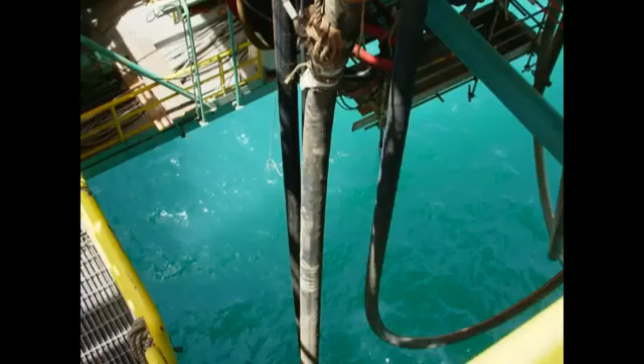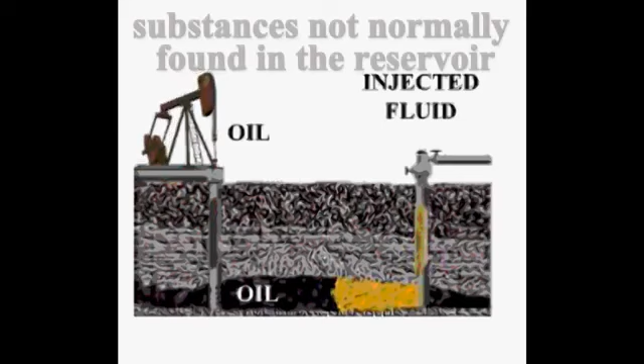Now let's discuss recovery methods using substances not normally found in the reservoir. There are several. The first is thermal recovery.

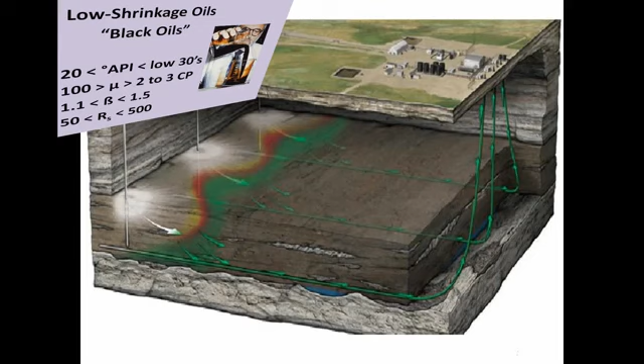Thermal recovery is preferred for heavier oils, especially oil with about 20 degrees API gravity or less. These heavier oils also usually require a secondary recovery mechanism earlier in the production cycle than lighter oils. In thermal recovery, heat is injected into the formation, reducing the viscosity of the oil, allowing it to flow more readily into the producing well.

As in water flooding, injector wells must be drilled, increasing costs. Instead of water, though, heat is injected into the well. In certain conditions, however, that heat can be created in the reservoir itself. There are three techniques used in thermal recovery, some more successful than others, but each offers specific benefits.

In the first technique, called fire flooding, a compressor at the surface injects air down into the injector well, providing oxygen to ignite the oil in the formation. The fire is controlled by how much oxygen is injected. The heavy crude oil is heated by the combustion of these hot gases, thus reducing its viscosity.

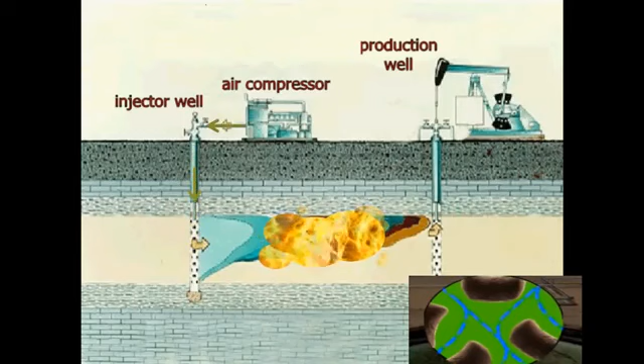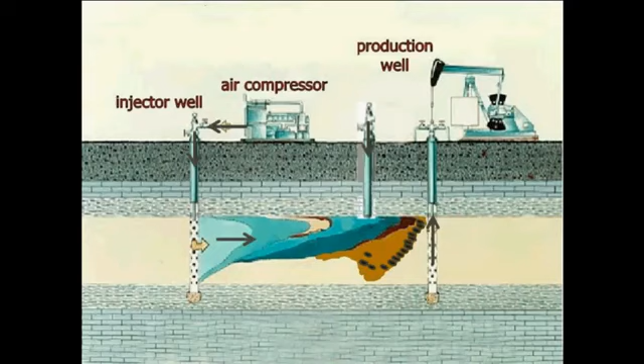This method is only partially successful because the colder, heavy oil located away from the burning heat source persistently resists flow and can even block the flow of the heated oil into the well. Additional injector wells can be drilled closer together to reach these cold spots, but this can prove to be a poor economic solution because this method consumes the oil itself and reduces it to useless char. Fire flooding is considered a final recovery method.

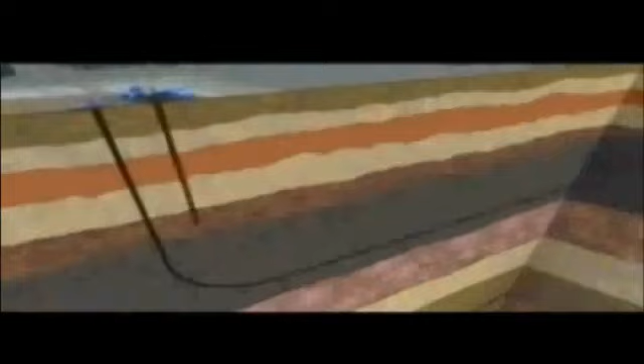A more efficient mechanism in thermal recovery is called steam flooding. In this technique, steam is generated at the surface and injected down into the formation. As the heavy oil is heated, the steam cools and condenses into hot water that is then allowed to soak into the oil near the injection well.

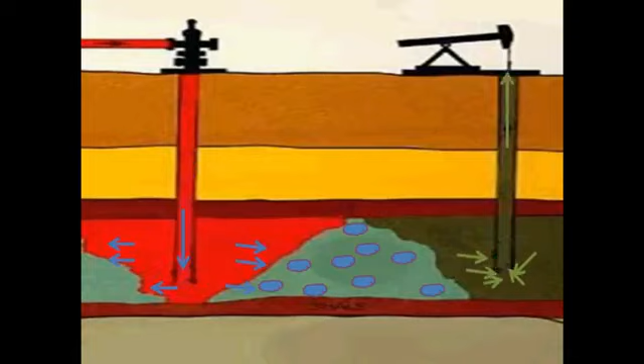This heat reduces the viscosity of the soaked oil, which can now be pushed toward the producing well. The cooler, heavy oil, away from the heat source, however, is not affected and may impede the flow of oil. Steam flooding can be very successful in shallow reservoirs where numerous injection wells can be drilled economically.

The most efficient and therefore the most successful form of thermal recovery is called cyclic steam flooding, or huff and puff. Here, a well will operate as both an injector well and a producing well at different times in a cycle, thus the name.

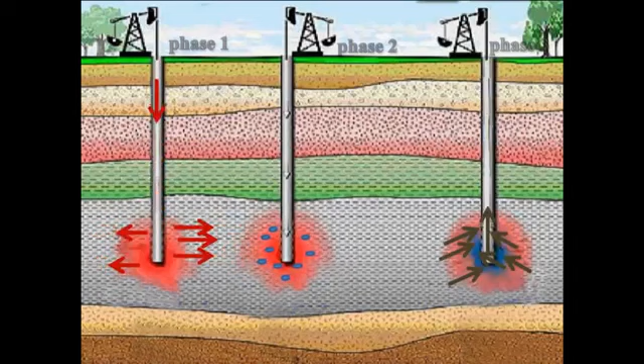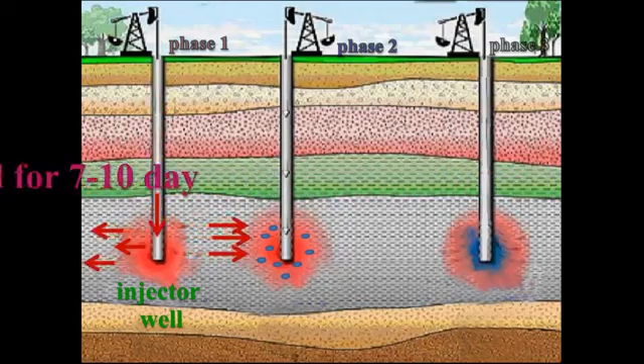In an injector well, steam is injected into the formation over a period of 7 to 10 days. Steam injection is then stopped for a few days, allowing the steam to cool to hot water and soak the oil around the injection site.

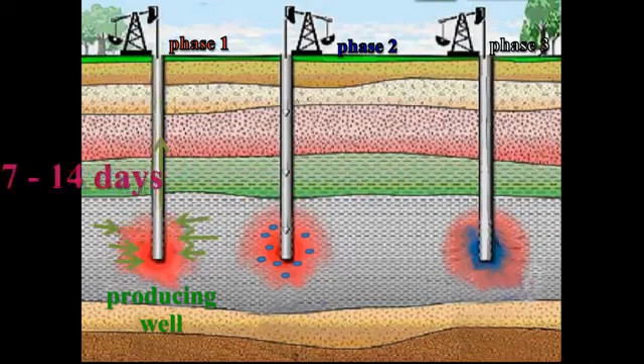When deemed ready, the injector well now becomes a producing well for 7 to 14 days, pumping out the less viscous heated oil. After pumping out this heated oil, the producing well becomes an injector well and the cycle begins again.

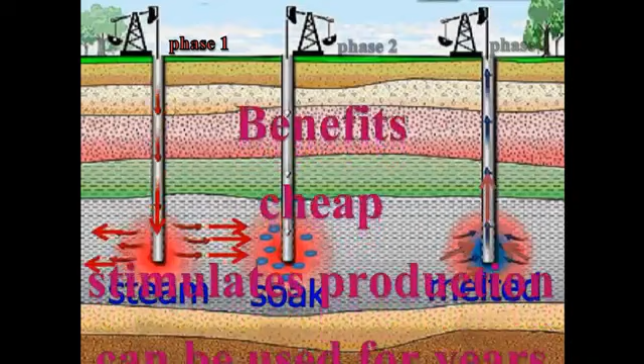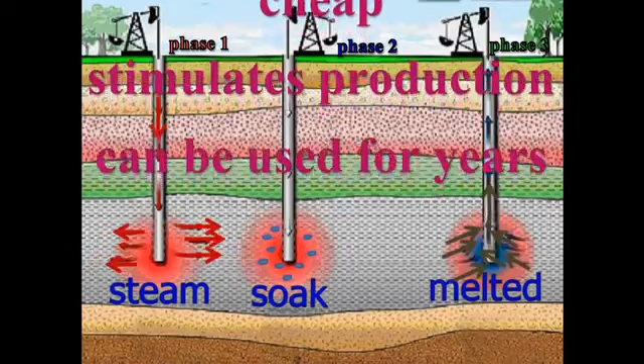The advantages of using cyclic steam flooding are many. It is considered to be a relatively cheap technique because it does not require drilling a large number of tightly spaced wells, and it sharply stimulates production. Because cyclic steam flooding can be used to produce a well for years, it is an excellent secondary recovery mechanism for heavy oil.

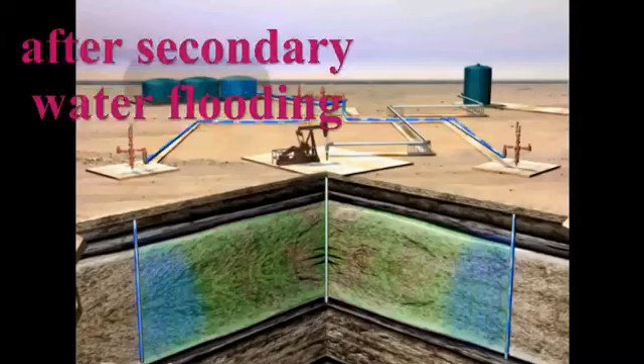Miscible flooding is another secondary recovery mechanism. Usually applied after primary depletion and secondary water flooding have already been used, miscible flooding is more commonly used as a tertiary recovery mechanism.

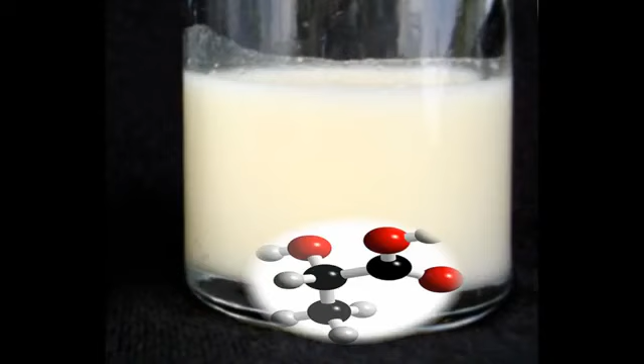If you remember from your chemistry, a miscible fluid mixes with another liquid to form a single homogeneous substance, like water mixes with milk. This mixture does not change the molecular structure of milk, it just dilutes the milk or makes it watery. Miscible flooding depends on using a fluid that mixes with oil.

This fluid does not change the hydrocarbon molecule structures, it just dilutes the oil, making it less viscous. By the way, fluids that do not mix with oil, like water, are called immiscible fluids.

Utilizing the miscible flooding mechanism, a reservoir is flooded with a fluid that is miscible. This fluid causes changes in the reservoir fluid characteristics. For example, it can lower the oil's viscosity. This, in turn, allows the miscible fluid to penetrate more deeply into remote recesses of the reservoir, lowering the trapped oil's viscosity and thereby allowing the oil to flow more easily.

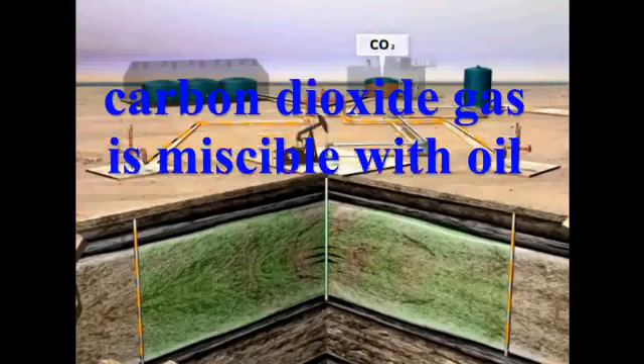Carbon dioxide, CO2 gas, is an example of a miscible fluid with oil. It is used effectively in miscible carbon dioxide gas flooding. CO2 can occur naturally in the underground reservoir along with the hydrocarbon gases. When using CO2 in miscible flooding, it is either harvested at the well site or transported from another area by pipeline. The CO2 gas is then injected under pressure into the well.

Once injected into the reservoir, the CO2 mixes with the oil, causing it to expand while lowering its viscosity in the reservoir.

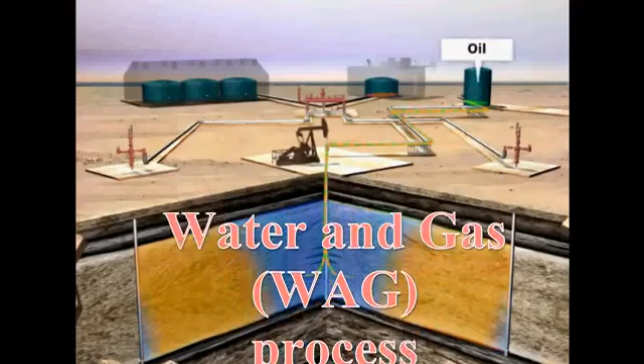CO2 works best when it is used alternately with a slug of water, because the water helps keep the CO2 moving evenly across the formation. This is referred to as a water and gas, or WAG, process. Using the WAG process improves sweep efficiency because more of the reservoir rock is in actual contact with the advancing gas being pushed by the water.

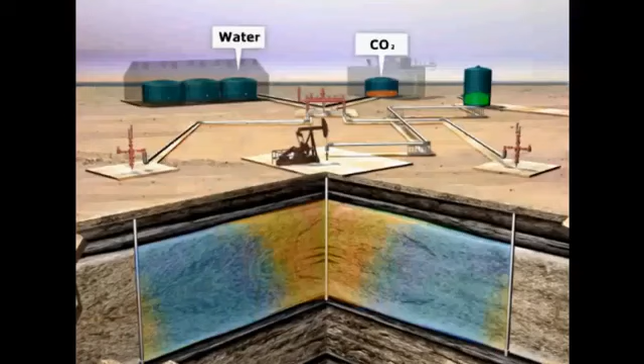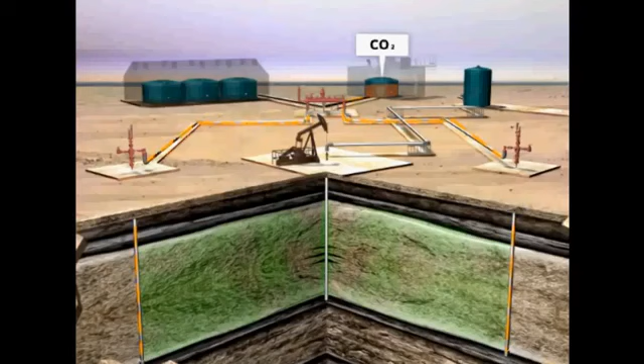The major expense in CO2 gas flooding is the investment in surface facilities needed to separate CO2 from the hydrocarbons. Fortunately, once the CO2 has been separated from the other gases, it can be compressed and re-injected back into the well, allowing for a continual process.

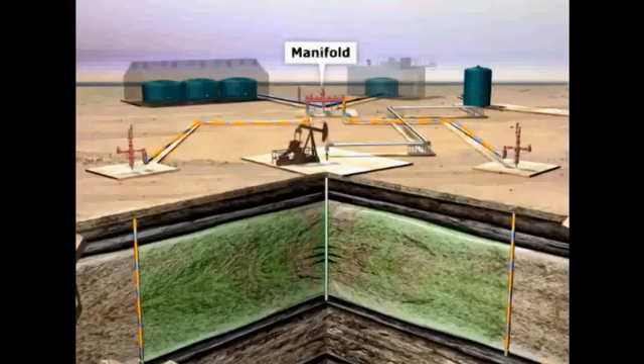In addition to CO2 gas, there are other effective miscible fluids. Among these are liquefied petroleum gases, or LPGs. Although resulting in high recovery, using LPGs is usually too expensive, especially when the LPG market price is high.

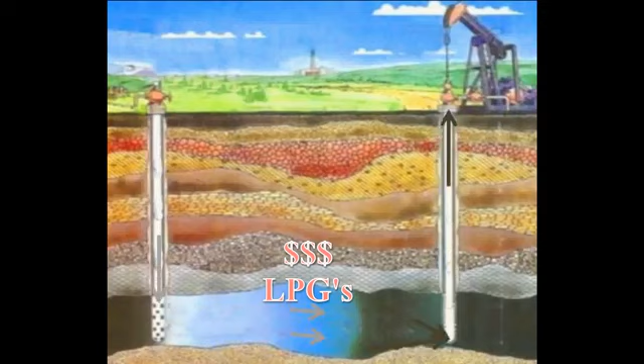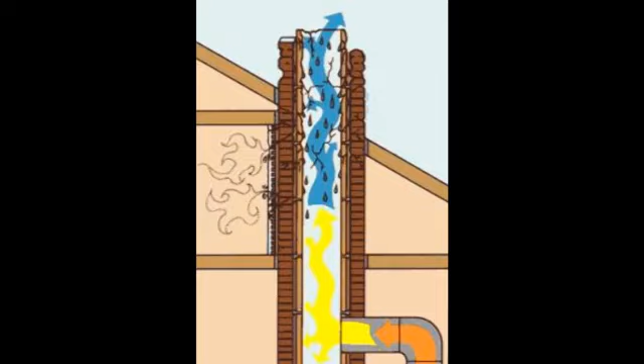Flue gases can also be used. Flue gases are waste gases that are released in industrial processes using oil, gas, or coal. Being able to efficiently use flue gases in miscible flooding is limited because most of these flue gases are not readily available.

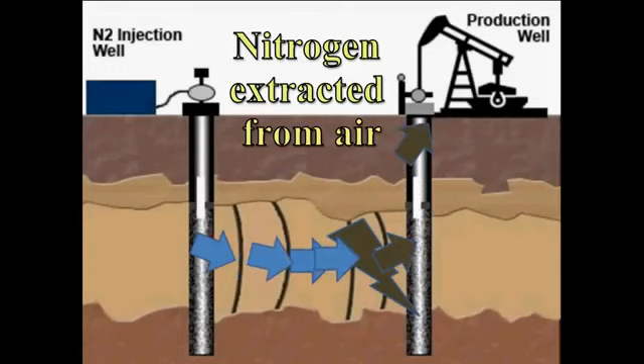Nitrogen extracted from air can also be used in miscible flooding. However, nitrogen is only miscible in deep reservoirs with very high pressures.

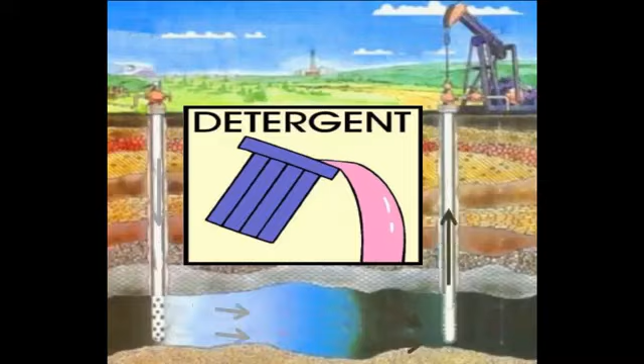Detergents are another miscible fluid. When used, detergents are injected into the formation followed by a water sweep. Again, although high recoveries are possible, the cost of detergents can be a deterrent.

Alkaline or caustic substances can also be injected into the well for high recoveries, but they are usually unpleasant and unsafe to handle. Like detergents, these caustic substances are also very expensive.

Mobility ratio is a fourth type of secondary recovery mechanism. Here, polymers, long-chain chemical substances, are injected into the well and help reduce the friction or surface tension between the water and oil molecules and the rock surface.

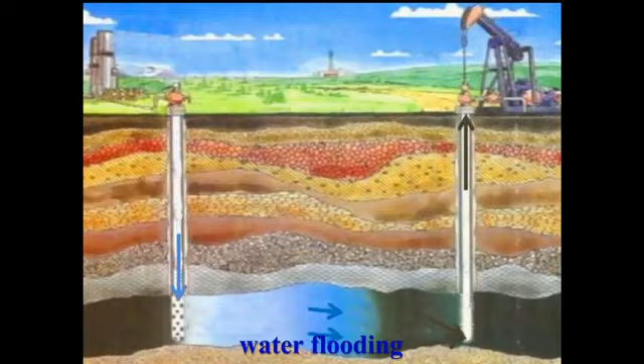Polymers have shown promise when coupled with water flooding. Water injections into the well are alternated with injections of water mixed with polymers. The high cost of polymers limits the economic feasibility of using this method.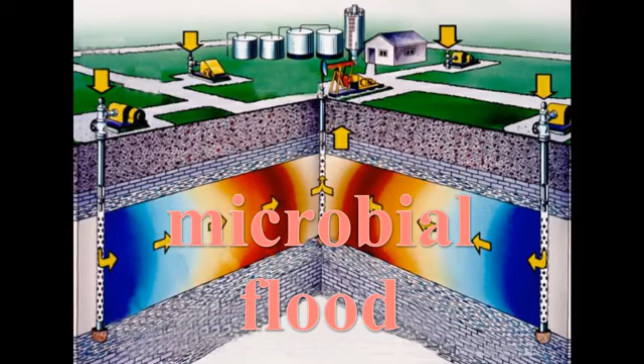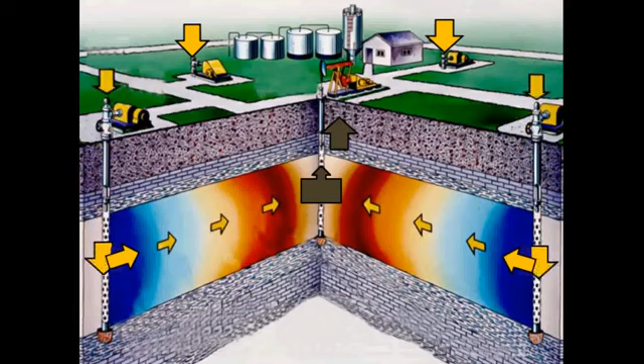The fifth and last secondary recovery mechanism mentioned here is the microbial flood. This process can be very useful under certain conditions. When using this mechanism, crude oil-eating bacteria are injected into the well. As these bacteria consume the oil, they produce a byproduct called methane gas, which is very miscible.

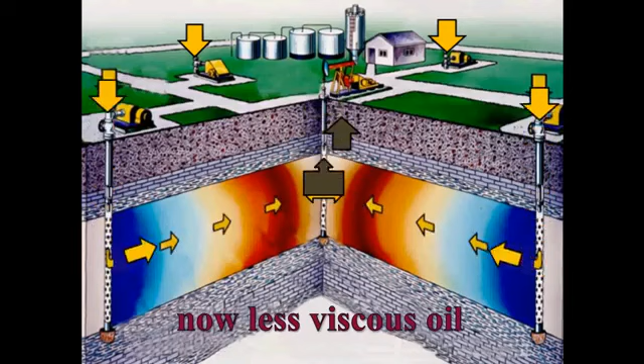As this methane gas is released from the bacteria, it creates pressure which pushes the less viscous oil out toward the producing wells.

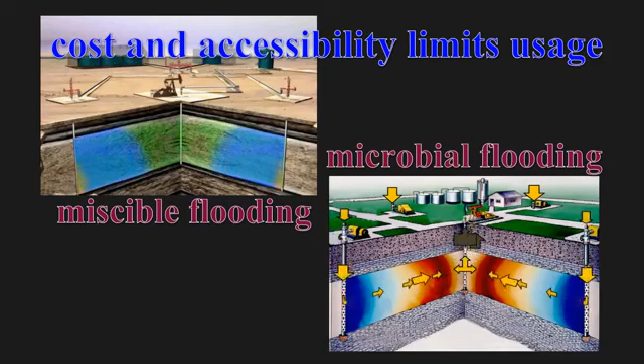As you can see, using miscible and microbial flooding in a secondary or tertiary drilling plan can have high recoveries. Each has advantages and disadvantages. However, because of their cost and accessibility, their use is limited. Currently, a lot of research is focused on finding ways to improve these technologies.

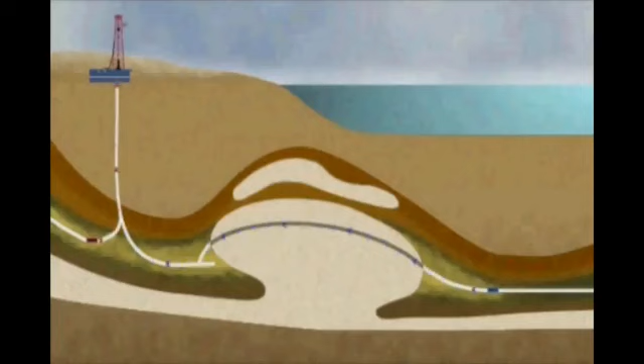So let's review. We have many different drives, or types of energy, that are used to push hydrocarbons to the surface. These drives can be the Earth's natural sources of energy, like water, gas, gravity, or compaction.

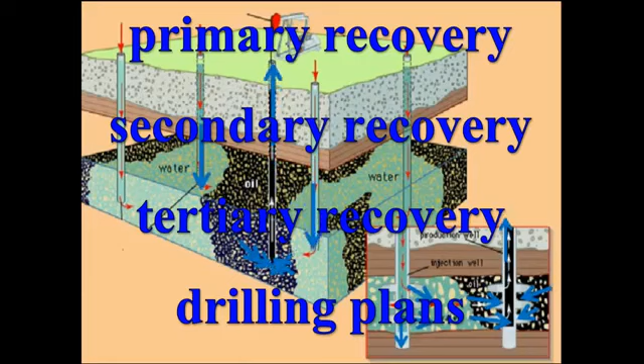They can also be man-made or man-harnessed, like water flooding, thermal flooding, miscible flooding, mobility ratio polymer flooding, or microbial flooding. Whether used in primary, secondary, or tertiary recovery drilling plans, these drives allow us to get high volumes of hydrocarbons to the surface cheaply and efficiently.

Now let's turn our attention to another important task for reservoir engineers. They must calculate as accurately as possible how much recoverable hydrocarbons are in the reservoir.

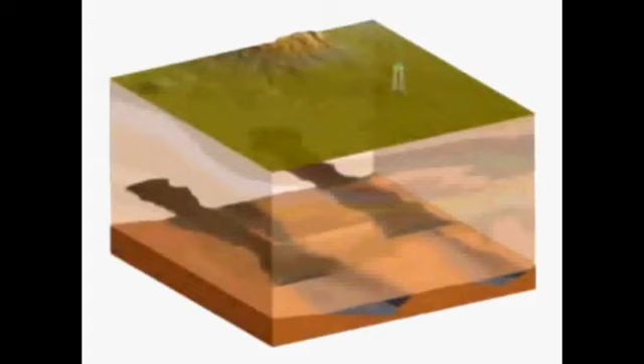These numbers are extremely important because they determine the future developments of the reservoir based on the value of its assets. But what are these assets, or reserves?

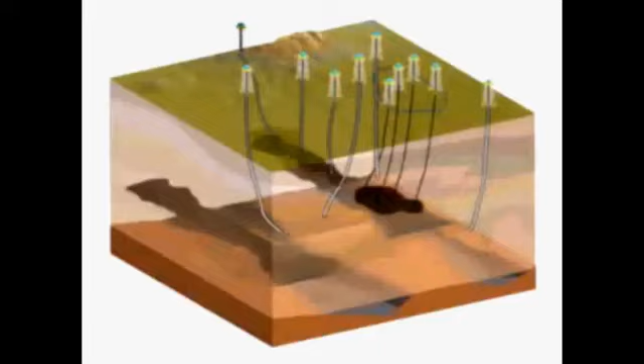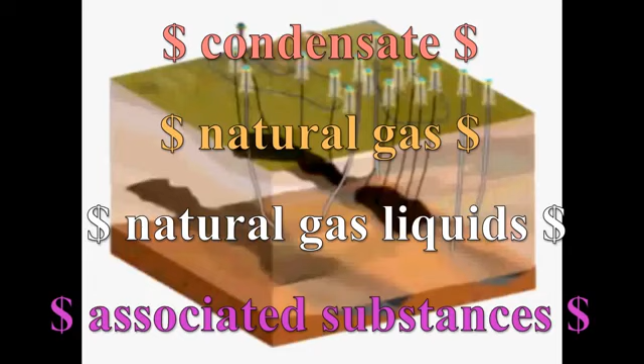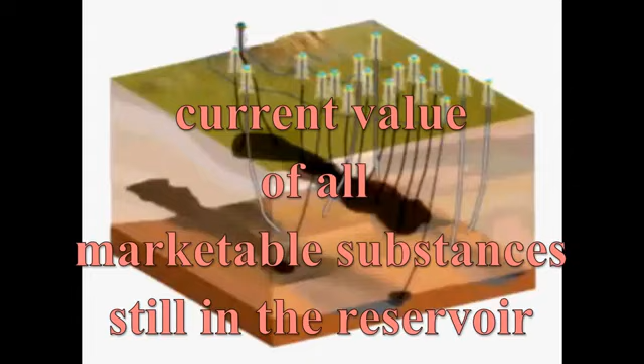Defined by the Society of Petroleum Evaluation Engineers, SPEE, reserves are estimates of the volume of crude oil, condensate, natural gas liquids, and associated substances thought to be commercially recoverable in the known accumulations of oil in the reservoir from a given date forward. In other words, reserves are the current value of all the marketable substances in the reservoir that have not yet been produced.

Oil companies want to be assured of how much production of the different petroleum products they can expect before they continue investing more money. In arriving at an amount accompanied by the value based in dollars, the current value of hydrocarbons is based on the price in the marketplace.

In addition, they also calculate the costs of adhering to existing governing regulations and the cost of extraction based on current technology. These reserve estimates are used to determine the potential value or wealth of an oil company.

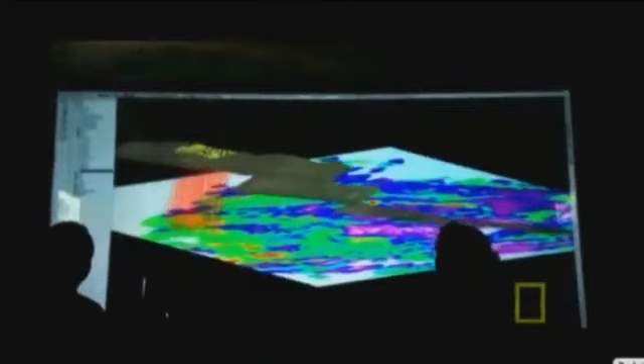Remember that since oil reserves are hydrocarbons still in the reservoir, their recovery rates can only be estimates. In ascertaining how much oil can be recovered, however, assumptions and estimates can be made with the full understanding that they are based on considerable uncertainty.

The future market price and advancements in technology, for example, can impact these projections significantly.